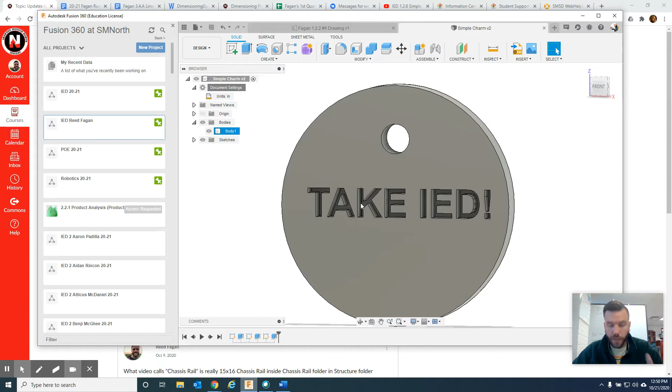But that is what you need. So let me click close for now - that's something I have to deal with at another time. I want to show you also, they have to be extruded a depth of 0.0625 inches, and I have done more than that with this extrusion. I could check that by clicking on that back line, clicking here, and it's going to tell me the distance - it's 0.125, so that's twice the distance it has to be.

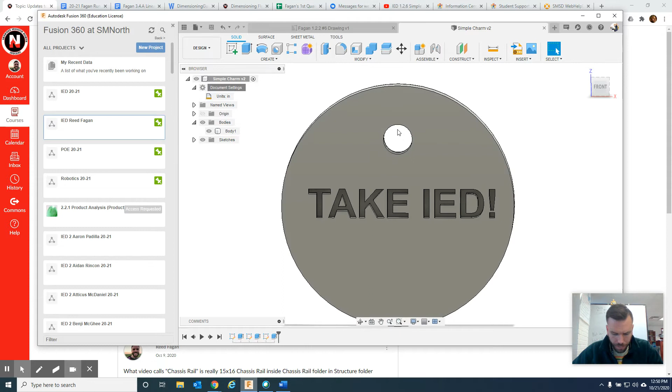Finally, this hole needs to be at least 1/8 of an inch across. Make sure I have that, and it's going to give us the diameter - yeah, so that's almost 1/4 of an inch across, so that's good there.

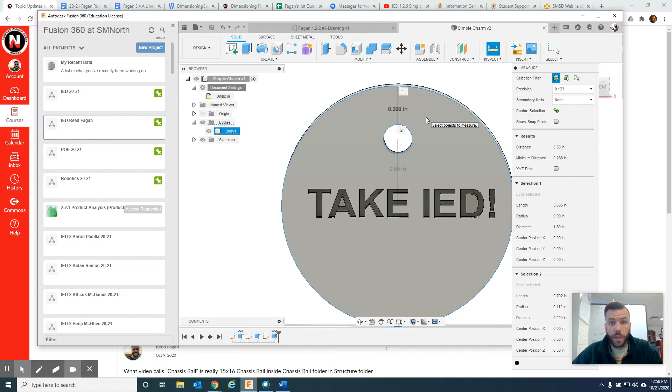And then it has to be more than 1/4 inch from the edge, because we don't want it to rip out or tear out. So using the inspect tool, I can go from here to here, and if you rotate it a little bit - with a mouse, you shift-click the mouse wheel and I can rotate it - you'll see that is showing this dimension. It's 0.28 inches, that's more than 0.25, so that is a good enough distance away from the edge so it doesn't rip through when that ball and chain is on there.

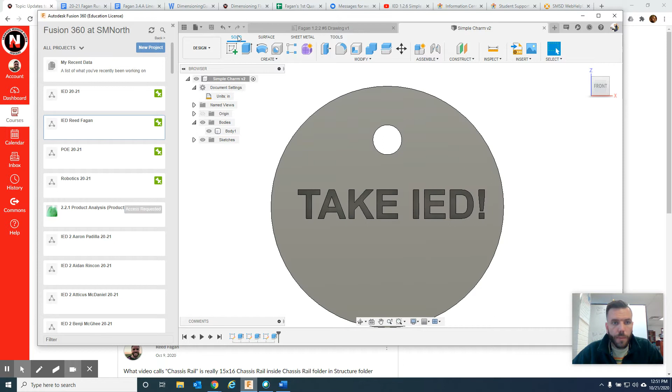Okay, so we've got this, and we need to make a drawing file. Make sure you've saved your work, then you change your workspace to drawing from design. The size of the paper you will want to be A, 11 by 8.5, so this option is what you want. Click that, click OK.

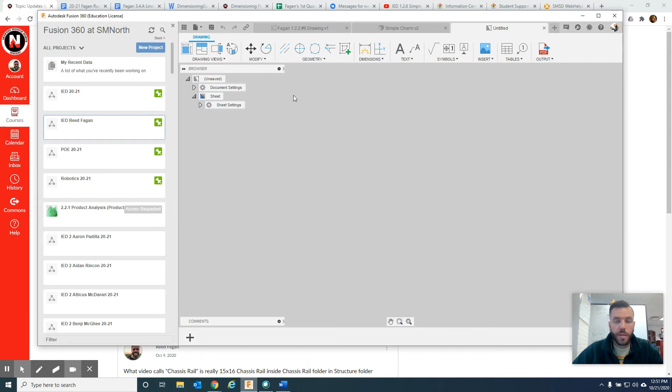Alright, so it's going to pull us into a new area. They call this a design workspace, and this is the drawing workspace. So I've got the right sheet size, and by default it knows I want to do a drawing of this. So I'm just going to place this here, and then maybe, let's click OK.

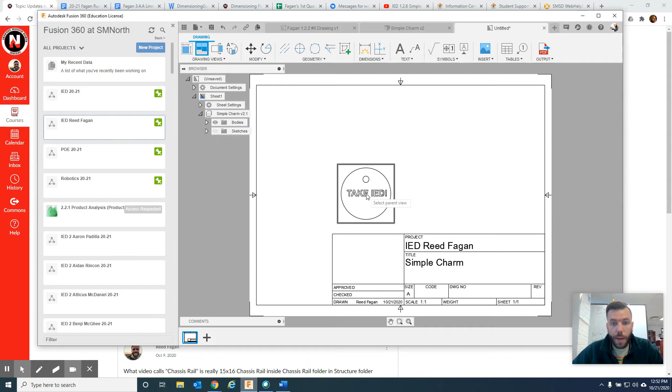Then I need maybe a side view because I want to show the depth, so I clicked this projected view. I click this again, and if I drag over here, look, it'll give me a side view. I'm not quite done yet, so I also want an isometric - check it out, and put an isometric right up there. I'll click my check mark, I'm all done with that.

And so now we have to dimension it, and I said you just need the 3 principal dimensions. So to dimension your drawing file, you will come to dimension, with this little sunshine icon. So 3 principal dimensions - that's height, width, and depth. Well, with a circle, height and width are the same, because that's how circles work. So I'm actually just going to do a diameter here.

So I'm going to click here, and then it'll let me place it. You want to do a leader line at a 45-degree angle, like we said - so this is a 90, this would be a 0. So let's put it about here, and that looks good.

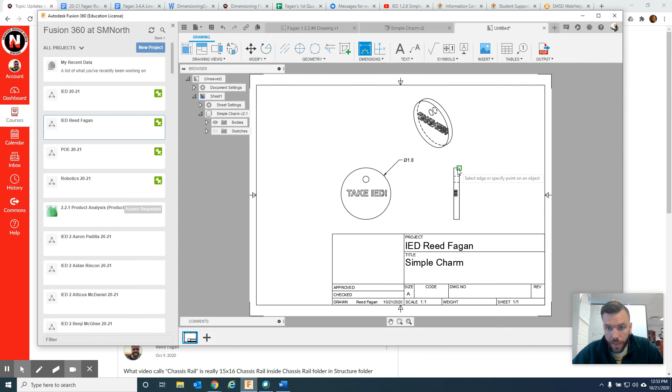I'm going to click - let's actually, yeah, we want to keep the dimension active. I was about to close out of it, but we need to do the depth of this, right? So I can click the top, or I can click from corner to corner, and then there we go right there. Alright, and I've got the dimensions we need.

Now that you have a little more knowledge, you know how to do some other dimensions. It'd be great to see you using that knowledge. So, for example, let me right click and say okay, you put a center mark where that's supposed to go, so that'd go right here. Maybe you put a center line through that hole - you pick the edges of it and there's a center line. That'd be nice for you to use that knowledge, maybe to dimension a few more things, but as long as you have the principal height, width, and depth, you are good.